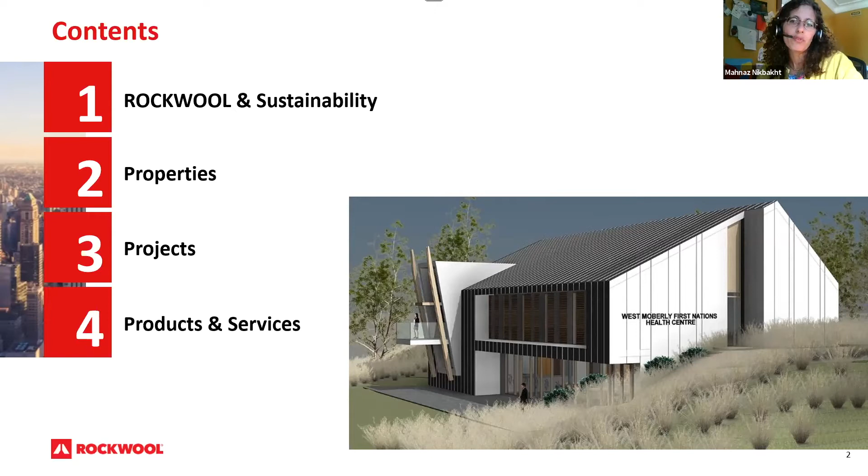Quick overview. We're going to do the intro on who we are and what our mission is. We want to speak about the specifics of our material, which is stonewool. Robert will speak about different projects that should be of interest to you, Passivhaus projects, and then, there's going to be an overlap, we're going to speak about the products and what services we offer to you. So let's get started.

Okay, so ROCKWOOL is a global company with its origins in Denmark. We have 5 brands. ROCKWOOL being the one that you probably know best for the building insulation. Rockfon is our acoustic ceiling solution. Rockpanel is not available here yet. It's an exterior cladding solution for buildings. Then we have Lapinus. It's a specialty application for noise and vibration control, and Grodan is quite a different thing. It's used as a substrate in the horticultural industry. And all of these products are made predominantly of basalt rock.

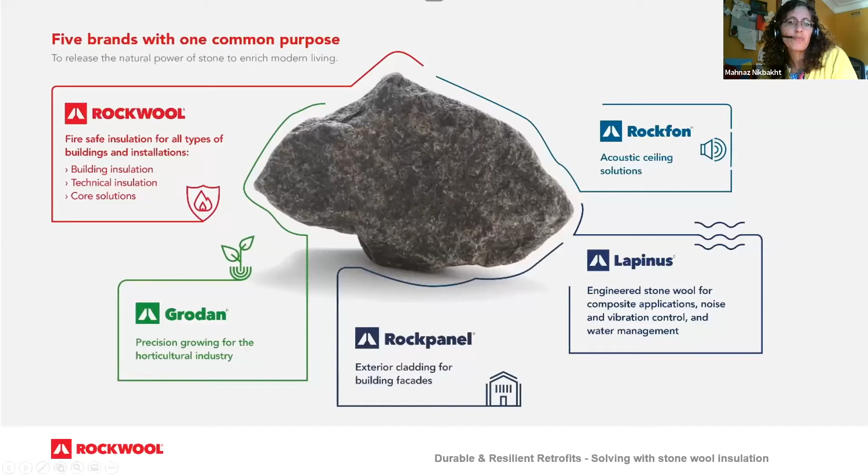So, I'm just going to speak a little bit about delivery issues. We are facing the highest demands ever, and all of our plants and all of our manufacturing teams are working like crazy to make as much ROCKWOOL as possible. We're constantly adapting our processes to have better output. In fact, all of our manufacturing sites have the highest output they've ever had. So we are creating as much as we can. We're at the top of our capabilities. We're expecting a bit more to come from the new plant. But we're really working very hard to make sure that material gets out of our plants to you.

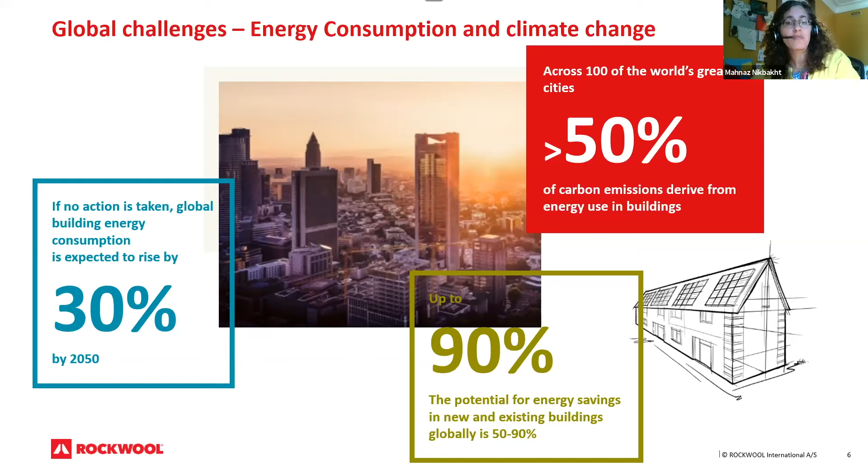So let's talk a little bit more about energy efficiency, energy consumption. We all understand that it's cities and buildings that contribute most to global energy consumption and to carbon emissions. And this is the reason why we're here. ROCKWOOL is part of this solution by improving energy efficiency with our insulation materials. So we've aligned ourselves with several sustainability focused initiatives to make a change. As a global manufacturing company, we really want to play a role in making those changes.

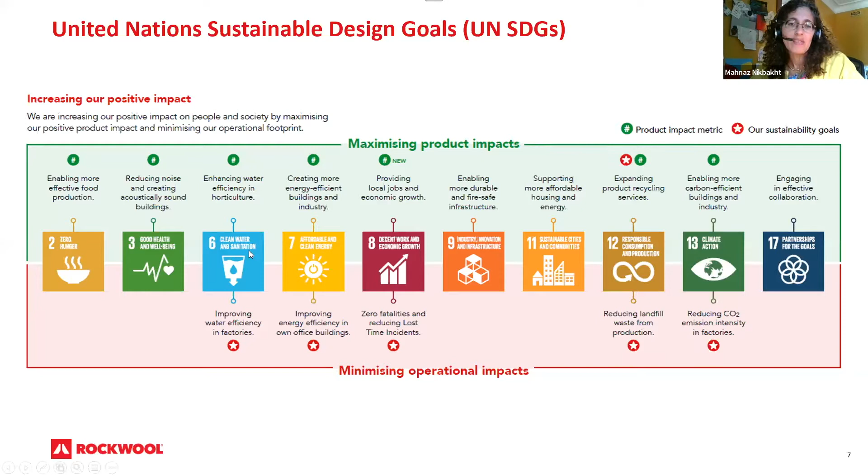And we've committed to the United Nations Sustainable Development Goals. These are 17 different goals, and we've committed to 10 of those. What we're doing is either we're minimizing the product impact, we're maximizing the impact that the product can have on these goals, or we're minimizing the operational impacts that we have. So as an example, this here comes from our sustainability report that you can download from our webpage.

When we're looking at goal number 13, climate action, we're committing to reducing CO2 emissions from our stonewool production facilities by 20% by 2030. Or if we talk about affordable and clean energy as one of the goals, we are committing to improving the energy consumption of our buildings. So what we can see here on the right-hand side is our office in Gladbeck, Germany, which is, apart from the Denmark ones, one of our oldest sites, and it's going through a deep renovation where we're looking at improving energy efficiency by 80%. So that's aligned with the UN sustainability goals.

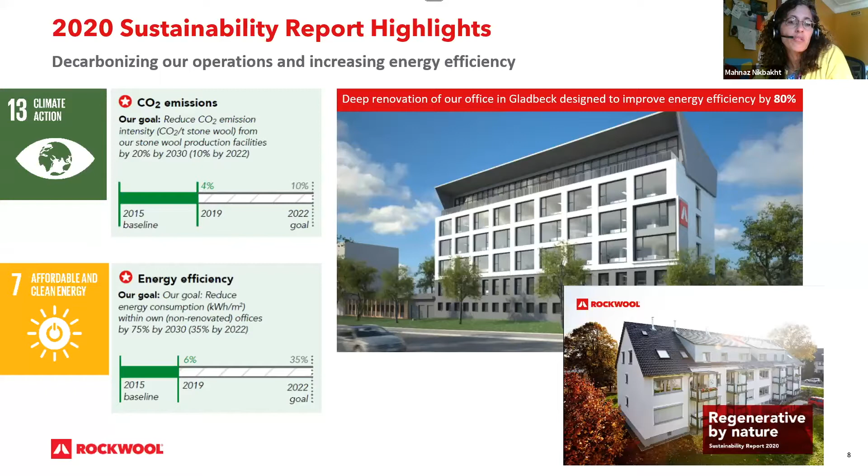We're also committed to the Science-Based Target Initiative. This is an initiative that drives climate action in the private sector so that companies get the support and also the control and the review to set science-based emission reduction targets. So we're in our third year now. We started in 2019. And we believe that the private sector definitely plays a big role in reducing greenhouse gases. So our plan is to reduce by a third the greenhouse gas emissions within 15 years.

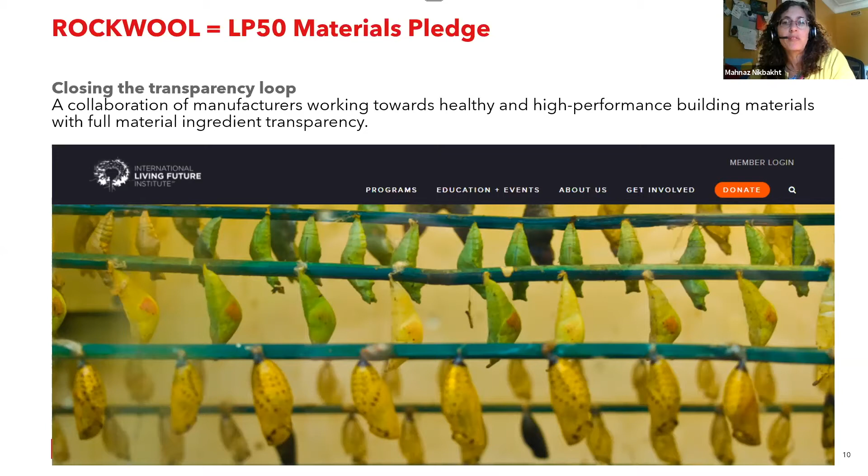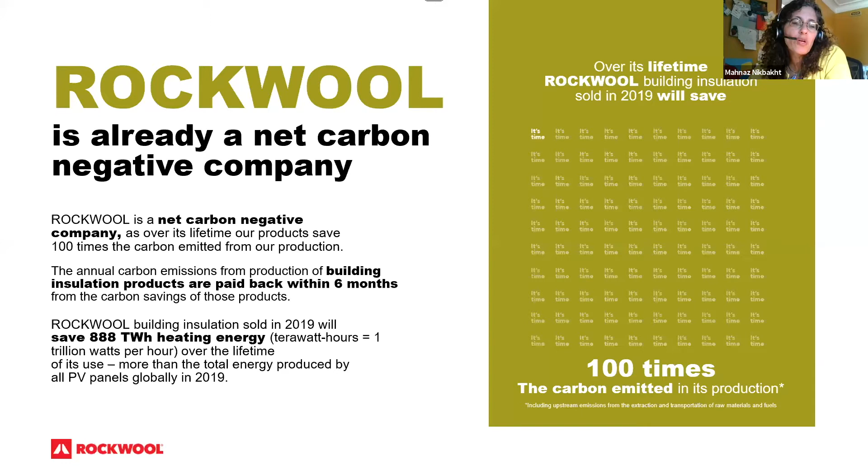We're also participating in the LP50 material pledge. So we're working on having more transparency of materials. And finally, we've been looking at our products and the impact that they have. And we are a net carbon negative company because when we look at the lifetime, when we look at the material, we took 2019 as a baseline. So if we take all of the material we sold in 2019, over its lifetime, it's going to save 100 times the carbon that was emitted in its production. So we're really trying to improve the impact that our materials have.

And finally, Rockwool and Passivhaus. It's an old story. It's been going on for quite a while. We're involved with a number of Passivhaus groups, associations. So we are the sponsor here of the Passivhaus Accelerator. Me personally, I'm the chair of Bâtiment Passif Québec, where we're trying to do everything in French language. Our colleague Todd Kimmel in New York is on the board of the New York Passivhaus Association. We have members in the Passivhaus California group. We're supporting the Passivhaus network. So we're really trying to make everything move in the right direction.

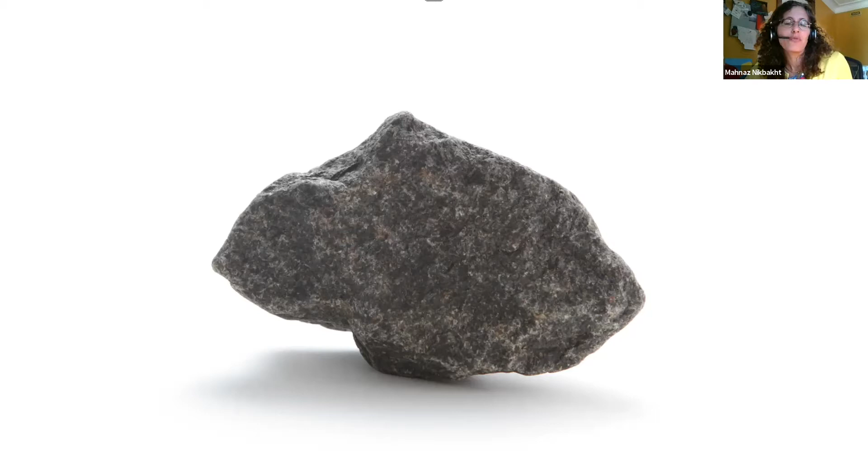So let's talk about properties and the environmental benefits of our materials. So yes, this is a rock, a basalt rock. I'm just showing this because the material we use, stone, is a strong and resilient material. And our name Rockwool is there for a reason, because our material is predominantly made of rock. So that brings me to this point of terminology. There is the term mineral fiber, mineral wool, stone wool, slag wool. So I just want to clarify what's the difference, what is what.

So if we start with mineral fiber, that's a generic term for anything that is a fibrous inorganic substance. And we classify these into three groups: fiberglass. So fiberglass is a material consisting of glass fibers, and it's being used in many different applications and products. And the one that you probably know is either maybe for windows, or it could be the pink insulation material that you know.

Then there is the term mineral wool, and that might be a common term, but you might not necessarily be familiar with the subcategories, which are stone wool and slag wool. So mineral wool is made out of stone and slag. Stone wool is predominantly made from stone, while slag wool is predominantly made from slag, which is a byproduct of iron ore when you're producing steel. And then there is a third category, which is the refractory ceramic fibers. We don't really come across this too much in the built environment. This is for specialty applications in high temperatures or industrial applications.

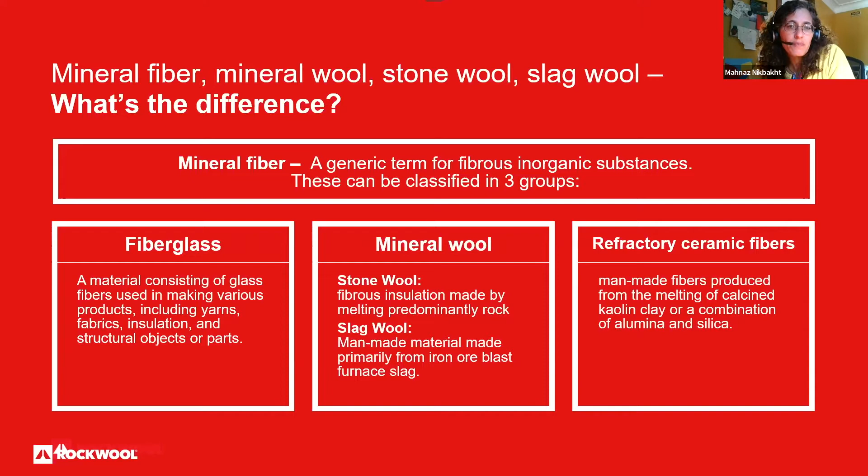So how is it made? Stone wool is made pretty much like cotton candy. It's kind of weird to imagine, but instead of taking sugar, we take basalt rock and steel slag, and we melt it at high temperatures. And then, in our plants, this melted mixture is poured over spinning wheels, and these spinning wheels make fibers out of it, and these fibers are collected on some sort of a conveyor belt. And then depending on the speed, the throughput of the machines, you can make higher or lower density materials.

So I have to say, I'm waiting to be able to go visit the plant, because I started with ROCKWOOL 10 months ago, so within the COVID period. So I'm very eager to actually see this process myself.

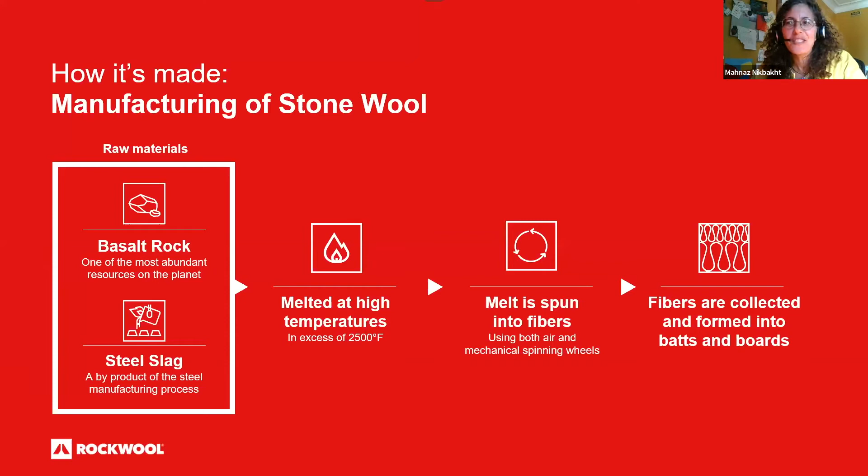So what's interesting with stone wool insulation is that it has a lot of versatility. What do I mean by that? This here represents densities. On the left we have low density, on the right we have high density. And we typically know mineral fiber materials, or fiberglass, for low density materials. And when we're looking at high density or more rigid materials, we typically know foam materials. And the interesting thing with stone wool is that you can actually make all of it.

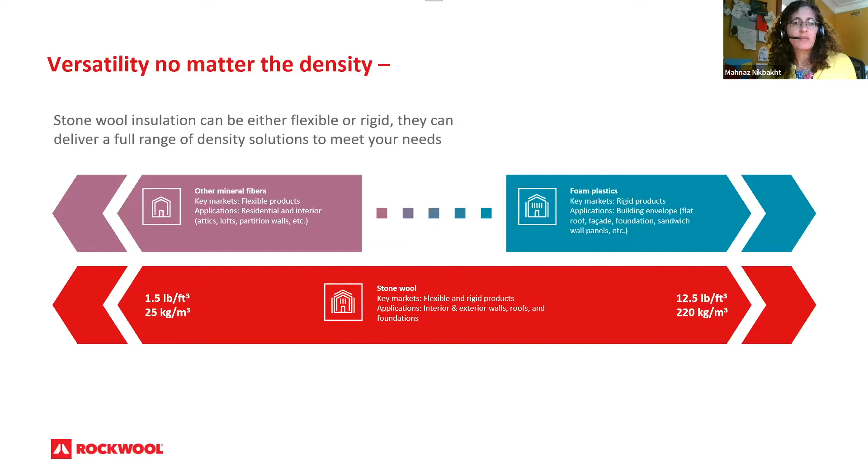So you can have your batt insulation, which is a low density material, as you can see here. Maybe this kind of gives us a better idea. So we have a low density, this is comfort batt material that is kind of soft. And on the right-hand side, you have a board. So we can also transform this stone fiber into rigid boards with high or very high or extremely high densities, and use it as a panel.

Okay, so just to finish up, to summarize, the benefits of using stone wool are numerous. So non-combustible, I think that is clear to everybody. It's a key property to our material, which differentiates it a lot. But another point is, what I was trying to show with that stone photo is that it's kind of just a stone. It doesn't do anything. It's thermally stable. It doesn't move. It doesn't change. It has an R value that is stable over time. And at the same time, it's also stable dimensionally.

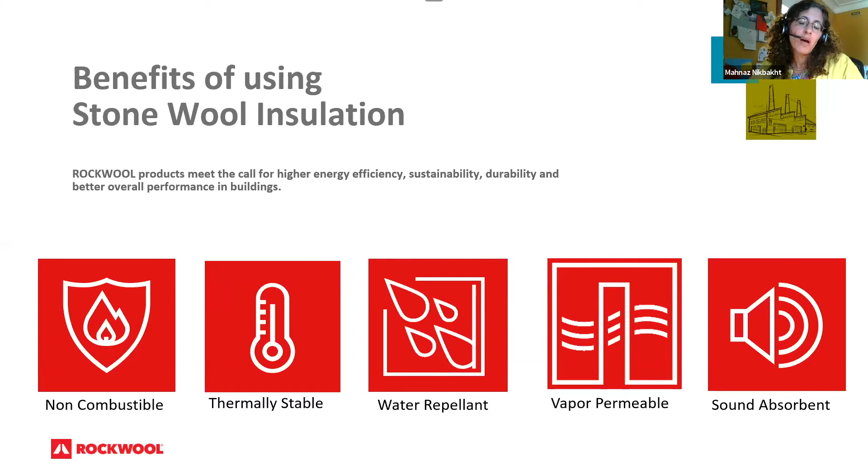It's a water repellent product, so it's naturally hydrophobic. It's a vapor permeable product, so depends on which school you're from, but if you're into the vapor permeable structure, then you want to have a material on the outside of your building or on the inside that allows humidity to escape and humidity to dry out, because it gives you an extra security. And then mineral wool being more on the heavy side, it definitely is a great addition to create a higher acoustic performance for your building. And I think with that, I'm going to hand this over to Robert.

Thank you, Mahnaz. Give me a second here to switch screens. Can everybody see that okay? Yeah, looks good. Very good.

My name is Robert Blount. I'm the architectural manager for ROCKWOOL here in, I sit about 30 miles north of Boston in Newbury, Massachusetts. I've been with ROCKWOOL about 2.5 years. I've been in the building enclosure world about 20. I spent a good chunk of that time as an exterior enclosure consultant, also worked on the fabrication and installation side, mostly doing design assist with architects, trying to come up with a better and more efficient way to put together wall assemblies. I'm going to kill my camera because I live in the middle of nowhere and bandwidth is at a premium here, so I want to make sure that everything goes as smoothly as possible.

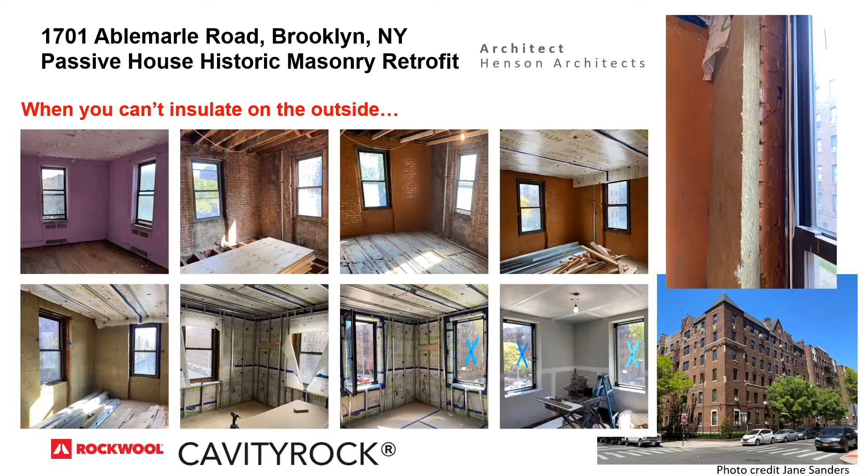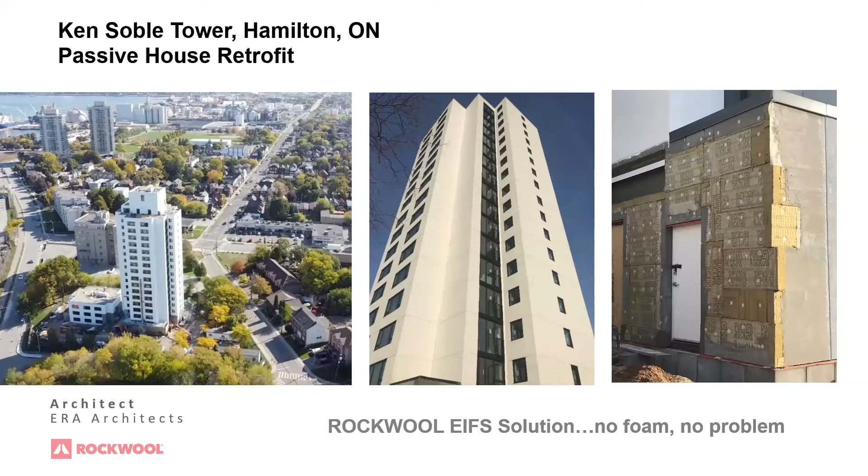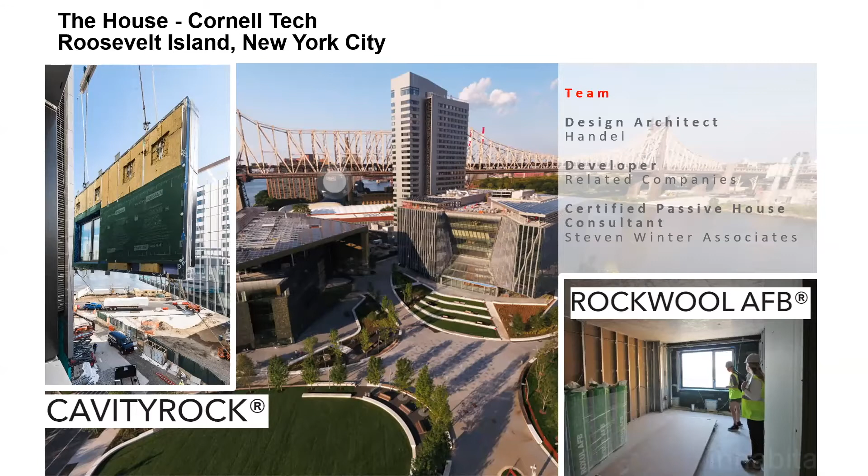It's estimated that the house will save 882 tons of carbon emissions per year, equivalent to planting 5,300 new trees. So as New York leads the way south of the border in lightening its environmental footprint, we here in Massachusetts, specifically in Boston, are actually following close behind with new legislation that's been passed just in the past week.

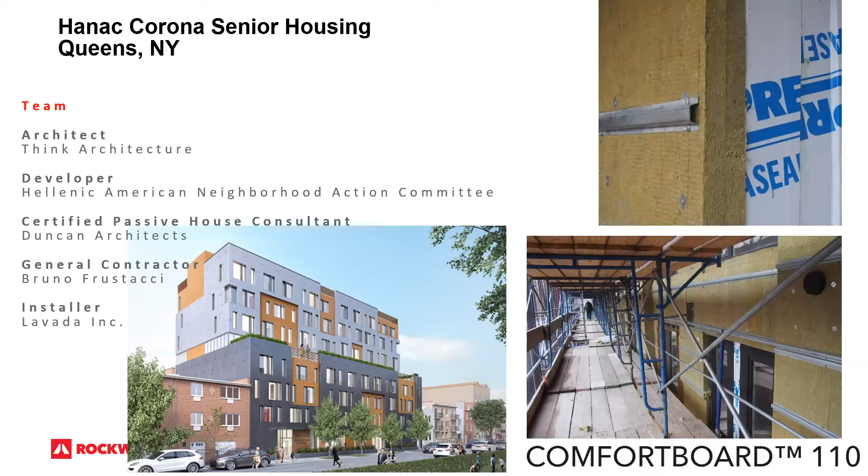Hanac Corona senior residence in Corona, Queens, New York. Think Architecture with CPHC services from Duncan Architects. This project provides 67 units of affordable housing to seniors, folks over 62 earning between 40 and 60% of median income in New York City. That includes 21 apartments set aside for formerly unhoused folks. It's one of the largest low-income senior housing developments in the nation to be passive house certified.

Skeena Residence at the University of British Columbia, setting new standards for the university with a new student residence on the Okanagan campus. This residence houses 220 students in a typical dorm design with side-by-side singles. The structure was kept pretty simple - it only has 2 openings, entry and exit doors, to maximize tightness. This was completed in 2020.

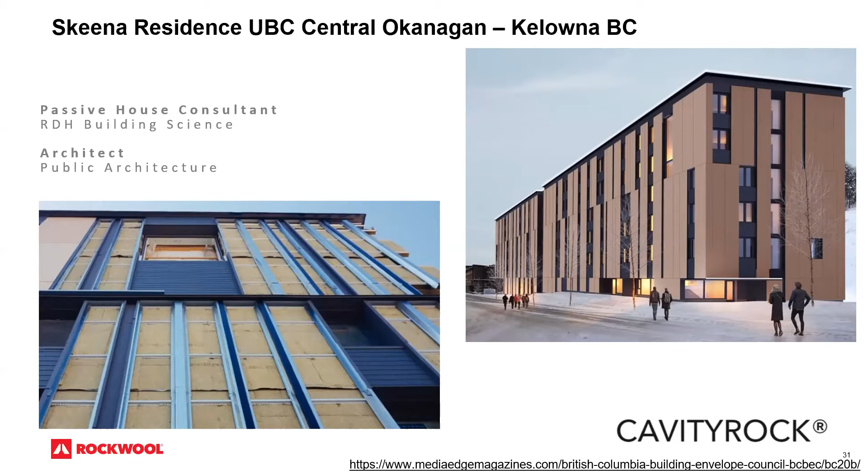I'm going to talk a little bit about our products. We've seen a couple of projects, so now I'll talk about which products work in which applications.

Cavity Rock is our semi-rigid board, and if you look closely in the photograph there's really 2 layers to the product. It's a dual density product - the out-facing layer is about 6 pounds per cubic foot, and the inner layer is closer to 4 pounds per cubic foot. The idea is this product is ideally used in conjunction with clip and rail systems with pull-through girts, and that softer backside of the material allows it to more easily conform around all that hardware. It also does a good job of sucking up any irregularities in the surface it's being applied to.

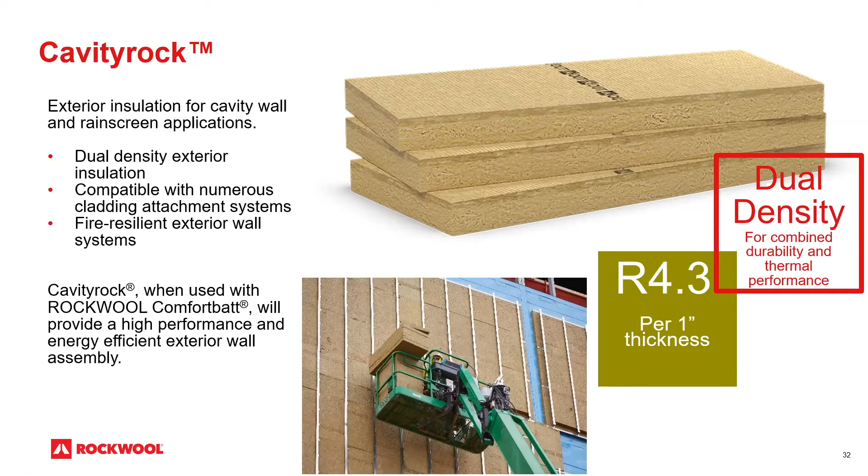When we avoid all those gaps and spaces, we also do a really good job of hopefully preventing convective looping. We see in studies that oftentimes in typical builds, convective looping accounts for up to 20% loss in overall efficiency in terms of R value.

We also have that same product, Cavity Rock, with a black facer. The black facer is simply a glass fiber mat - it doesn't affect the combustibility of the material. Having lived on the contractor installer side of the world, I joined Rockwool 2.5 years ago, and this product came back into play for us not long after.

I just finished a 110,000 square foot plus open joint rain screen system project and started looking at the numbers on what the savings are for skipping this step of applying a loose scrim facer. Depending on what your labor costs are and where you sit in North America, it's somewhere between $1 to $2 a square foot. So, hindsight 2020, I looked back sadly at what could have been saved there.

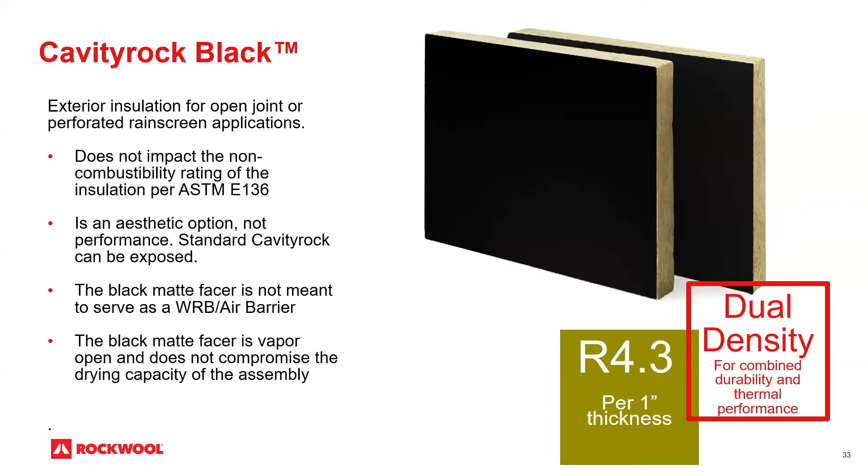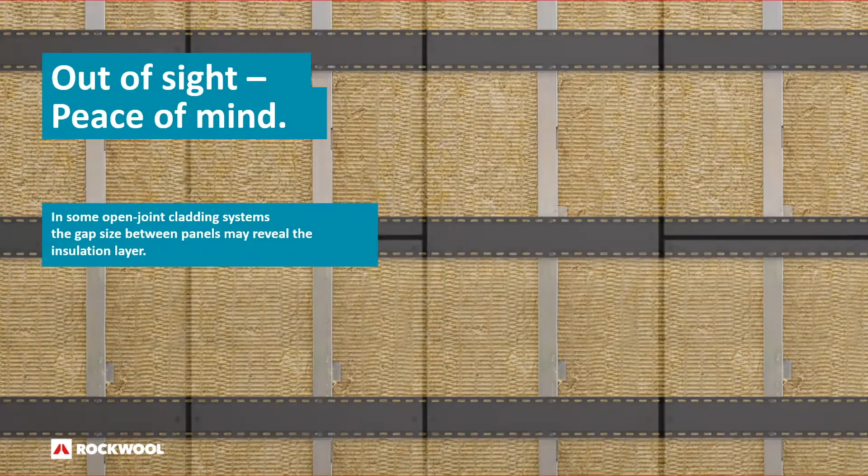I think we're all pretty familiar with what the rain screen application is for, an open joint system. Typically if you're not into seeing the beautiful brown material, that black facer allows you to skip a step. We also have recommendations for tapes that you can use on the seams to make that approach for an open joint rain screen system easier.

Comfort board 80 and 110 are our rigid boards, used in a screw-through application. Really we're working tension, compression, and friction against each other with these vertical girts and relatively frequent long screws that go through the insulation. So those are the only thermal bridges.

This particular approach, depending on your loading, is good for generally 15 pounds per square foot capacity. The 80 is typically seen more in residential applications or lighter cladding scenarios, and the 110 for heavier cladding scenarios.

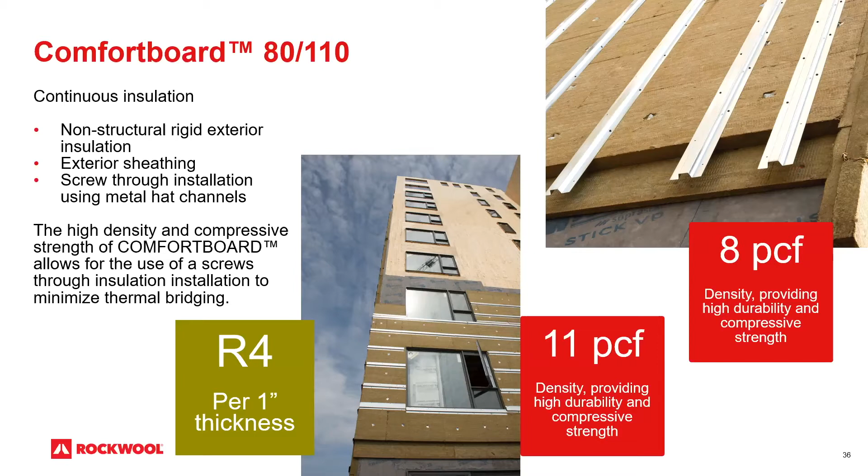Don't want to leave out comfort bat. In instances where we can't get everything that we need by doing continuous insulation on the outside, comfort bat is the material that we use in the service cavity, especially in urban environments where we've got a lot line and a setback and a client that wants every bit of programming space they can get out of that floor plate. Sometimes we're in the position where we're insulating both inside and outside the weather resistant barrier, and I'll talk a little bit more about that when it comes to hygrothermal modeling and some rules of thumb.

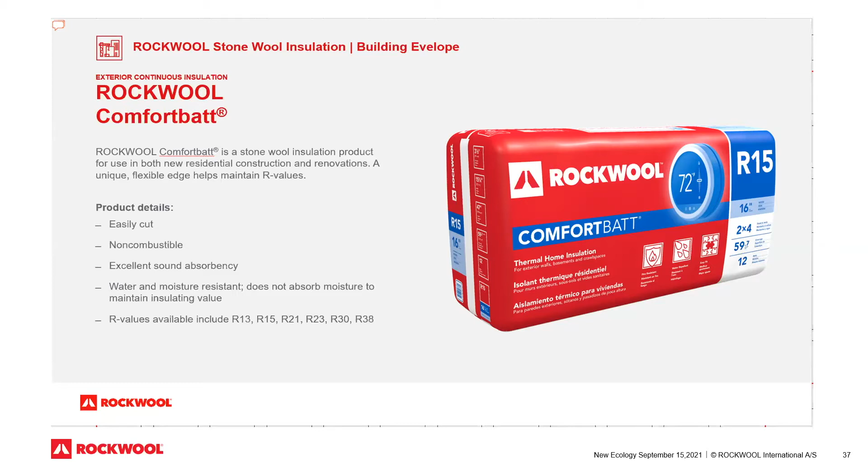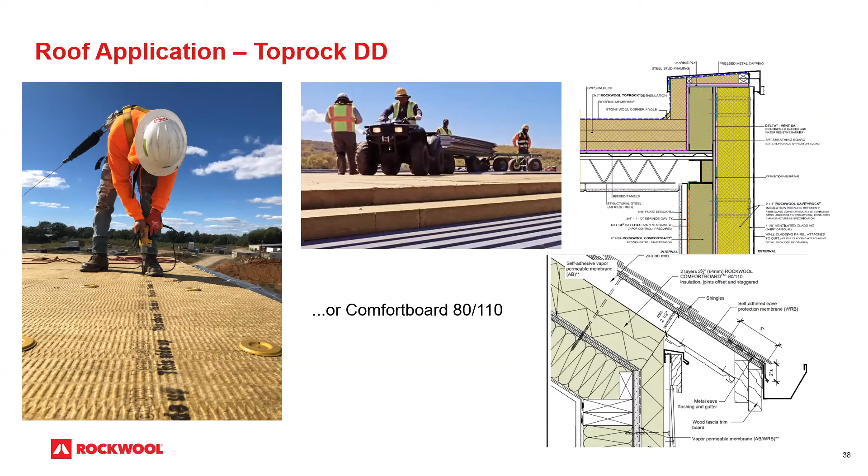The Comfortboard 80 and 110 can also both be used as below grade applications. Oftentimes I recommend that a dimple mat facer is used depending on your backfilling operations, just for protective, belt and suspenders protective measures, but it's not necessarily crucial to do so. Also, I think everybody's probably used to seeing these board materials in a 2x4 format.

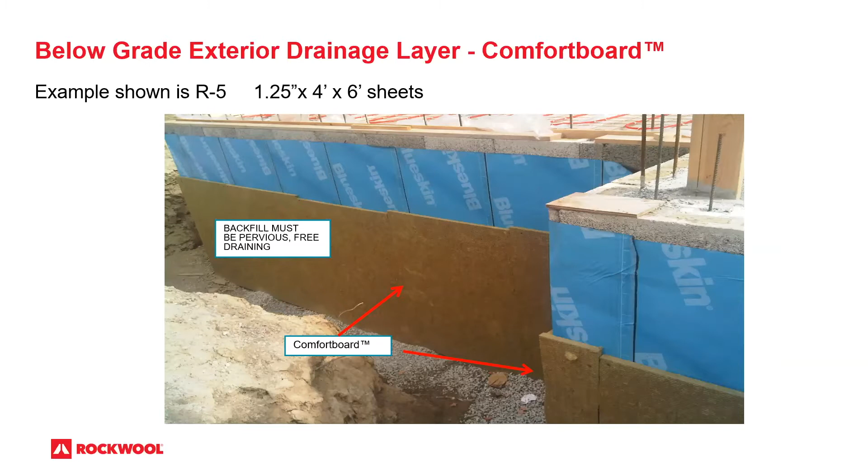They can be obtained in up to 4x6 sheets. The consideration there is that because these materials are 8 and 11 pounds a cubic foot respectively, at some point there's kind of a tipping point with how big you want that sheet to be and the weight and manageability of it.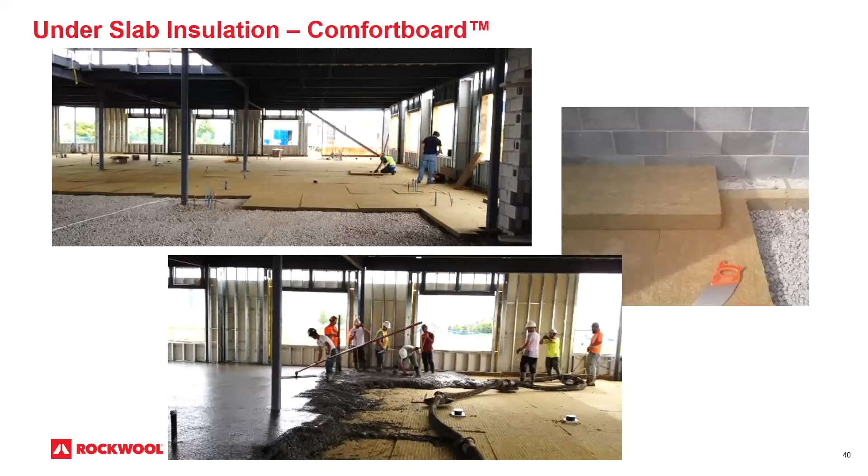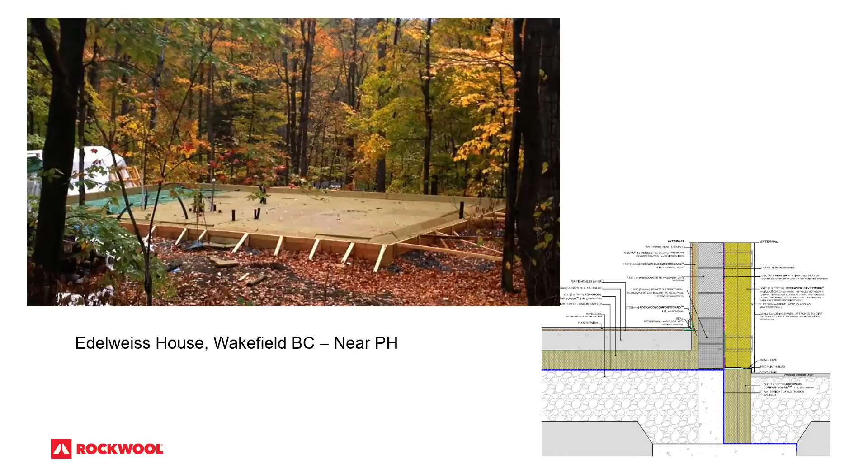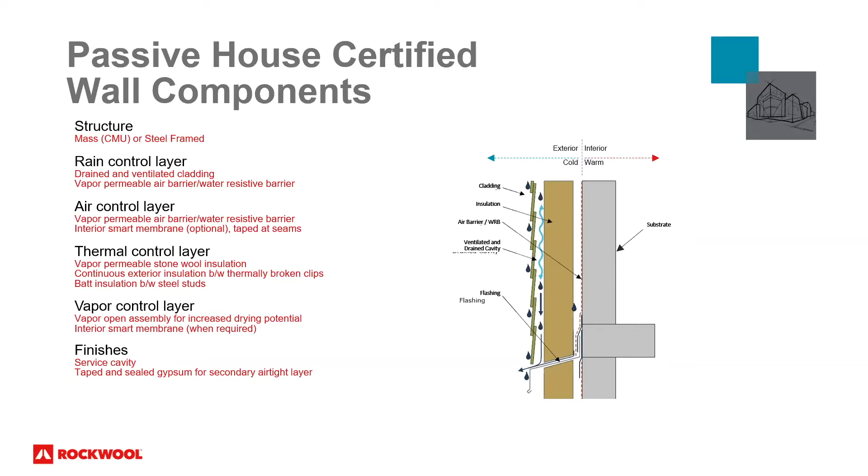In terms of services and support, we do have a number of details that are parts of passive house certified wall systems, where we take into consideration structure, keeping continuity with all of our control layers, and what finishes are going to be applied to those. We have available our Passive House Solutions Guide, which gives you a good starting point for using Stonewool in a passive house approach.

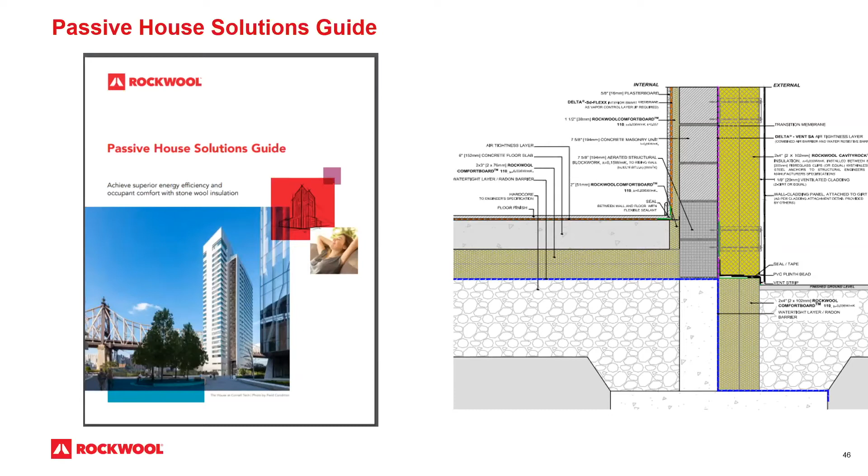We also have a number of case studies, amongst them the house at Cornell Tech, that let you see the material in action as we see more and more passive house happening.

But to that end, we also offer some building science support. We have a team of folks that sit up in Toronto and Milton, and they provide a complimentary suite of technical services that are also non-proprietary. So if you want to do comparative analysis on this material versus other materials and what your most likely paths of success are, they'll do R value calculations as they relate to your local code, 2D and 3D effective R values.

They'll do overall U value analysis, WUFI and hygrothermal analysis, full building modeling if you're willing to provide that kind of time and information, as well as a newly added acoustic analysis for STC. I've only worked for ROCKWOOL for a couple of years now, and I used this service pretty frequently prior to coming here. It's very quick - they say a week turnaround, but it's usually a couple of days. Really, they're looking to help folks find the best material that's going to lead to a successful project.

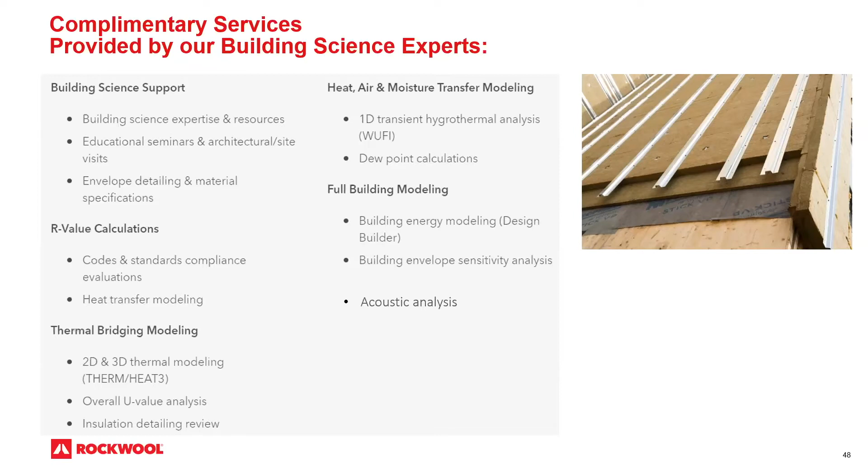This is what these analyses look like. This is everything from our basic effective R values to WUFI and hygrothermal analysis, including wetting and drying cycles in different parts of the year.

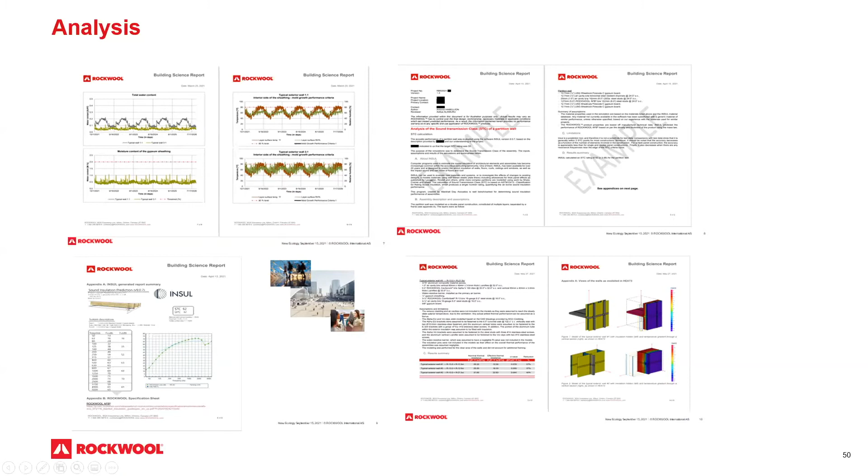We also have a number of other resources that if you reach out, we can provide you with, including cladding attachment solutions and some pieces on vapor diffusion, as well as some more hands-on guides for builders, as well as application guides for all of our materials.

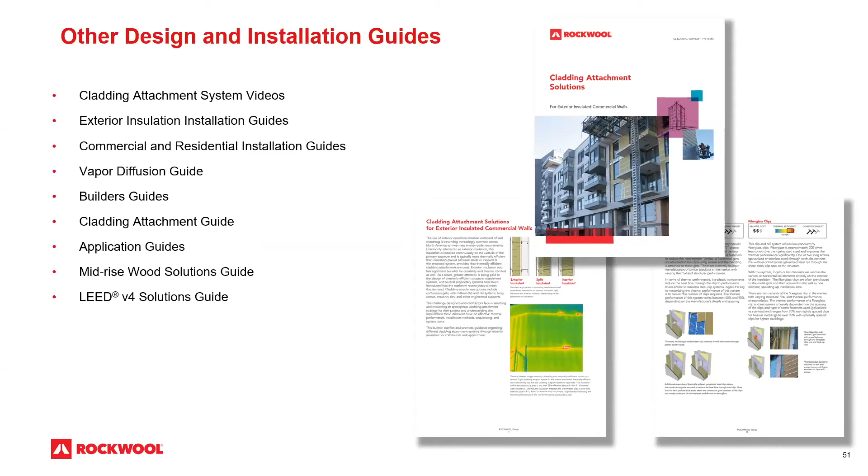And then, of course, there are a number of very knowledgeable folks that work with us as well. Mahnaz, we're lucky to have picked her up here in the time of COVID. Todd Kimmel, who I'm sure some of you know, who sits on the board of Passive House New York, and Alejandro Nieto, who sits also up in Milton as a technical manager, as well as myself here in New England. I'm actually working on my CPHC, so hopefully towards the beginning of the year, I'll be on that other slide.

Pamela Sadler, who is our spec manager in California and also part of Passive House California, and Ryan Foster up in Canada, who is our spec manager for Central and Western Canada.

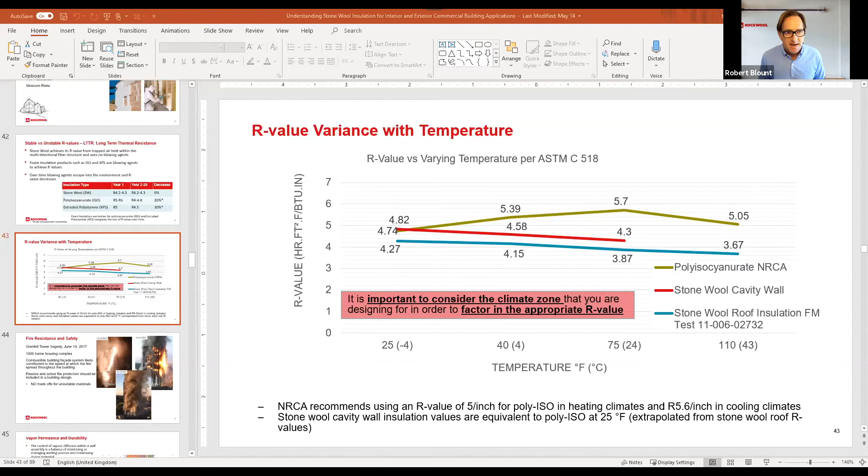These hybrid roof systems are, I think, becoming more and more common as, depending on what you're shooting for in R value, it's not always practical to use all stone wool. But if you allow those materials to work better by staying at a higher temperature, then you kind of get the best of both worlds, if you can't have a 40-inch buildup of insulation in cases where you're shooting for super high values on the roof. Mm-hmm. Hybrid roof, that's awesome. And also the weight can sometimes play a role. Yes, of course.

Zach gave me the platform, which maybe he shouldn't have done. So I've got a third one. It's just about harboring pests, and just a little story. So we're actually applying a bunch of Rockwool to our rural residence. We have a pest problem just because of where we are. And we had a weasel issue. A weasel that loved living under our house.

So we were installing a bunch of Rockwool, intended to be below grade, but it wasn't backfilled yet. And the weasel didn't mind it at all. She just pulled it away and went right through it. She wasn't mouthing it or trying to eat it or anything, but she's gone now. She destroyed it instead. Yeah. Anyway, we're happy to have that product on board. Okay, great. Thank you.

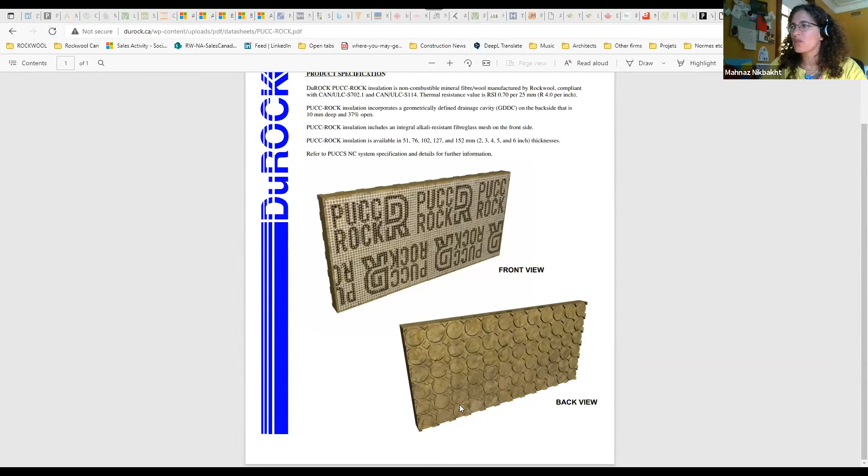I'm just going to share my screen. Why does it not do it? So it's ribbed or dimpled somehow. Yeah, this is the product that was used. Can everyone see this? So this has, on the one side, a mesh, so you can apply your finish, and on the back it's been treated like that. There are many different ways to do it, and honestly, I'm not fully up to speed as to who is making what and which is the Rockwool product or which is a product that belongs to Durock, for example.

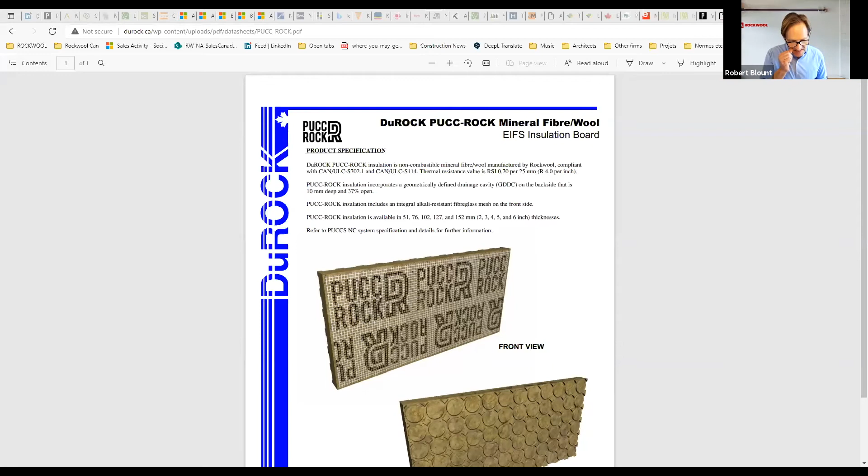There is some development going on. Maybe Robert, you know better because there are some differences between Canada and the US. Yeah. But I'd say that would be the main difference between a standard board and the specific product made for this application. Yeah, and in this case, it's kind of interesting because we're being used as a component in another system. So BASF, when they were still called that, had it labeled as their Vulcan, like volcano, Senergy system.

And now they're, for whatever reason, called Master Builders. And the most straightforward version of it, without adding lots of bells and whistles in terms of extra layers, basically it's still mechanically attached, and it uses a really heavy bead of sealant to push the board off the substrate to create that, you know, whatever it is, 5 millimeter or maybe a little greater gap for drainage to occur on the substrate.

Okay, cool. I do have another question then. The Comfort Board, or sometimes Rockboard 80, on a pitched roof, do you have limitations on the pitch? It doesn't really matter. There's no limitations on the pitch. I mean, engineering is always our limitation, right? So how many fasteners? Physics. Yeah, physics, it gets you every time.

You know, I was actually just going through this yesterday with a project almost in Canada, in Lake Champlain in New York. And they want to put 11 inches of material on a variety of pitches between 4 and 8/12. But it also happens to be a government project where FM Global applies. And so in that case, it would need to be Top Rock, because those are the products that are tested for commercial applications, and FM Global has gone through it with different roofing manufacturers. I believe ours is with Fabral.

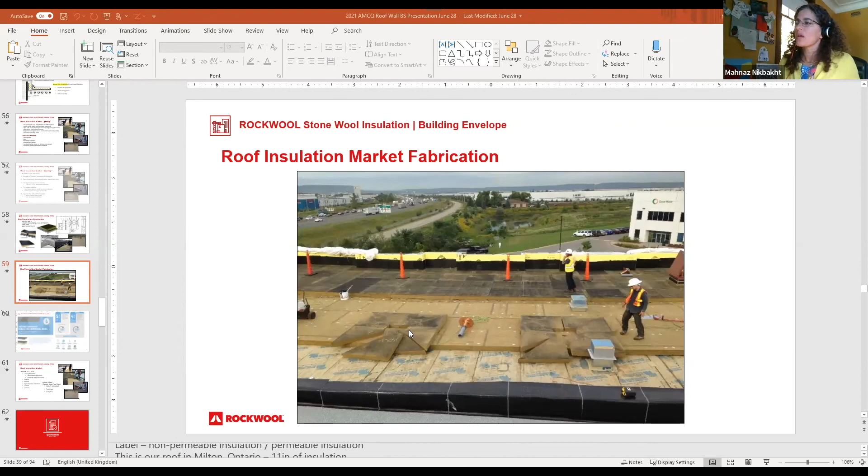If you have specific questions, I will post Joe Donnelly's contact information, and he, along with a couple of folks on his team, are definitely the folks to talk to about the nuts and the bolts on Toprock. Okay, thank you. Great, thanks, Stephen.

So Joe had another question. I think that he's not here, but I'll ask it for him. It looks pretty straightforward. PUCC-ROCK looks like it could be used under a radiant floor. How deep are the channels? Can they accept PEX tubing? I personally don't know. Do you know by any chance, Robert?

So I'm assuming what he's saying is to flip the material upside down so the tubing would be where the concrete comes in contact with it. Somebody else responded on here that they're 10 millimeters deep, but I think that's probably true. Which is a great segue, because the next question, and right now our last question, is from that somebody, from Lowell Lowe. So Lowell, please come on camera.

Hi. Can you guys hear me? Yes. Okay, great. Thank you. I'm in Toronto here. I'm a sole proprietor. I do kind of smaller projects, mostly like renovations and additions.

But in Toronto, there's a program called Tower Renewal. So they're retrofitting these solid brick apartment buildings, and there's one near my office that they're doing currently. They have these continuous horizontal and vertical channels. I took a picture of it actually, but the channels are anchored every so often. So it's not a continuously anchored angle.